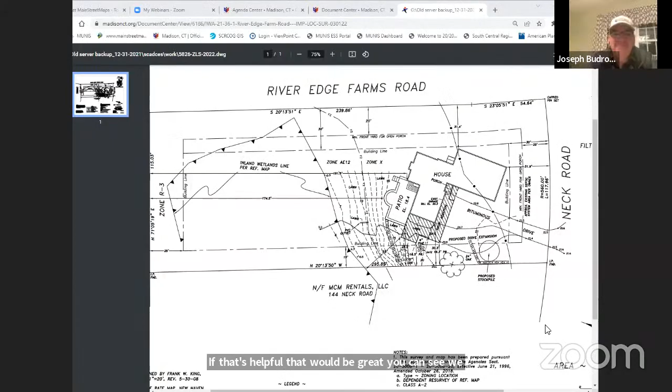Now we're talking, there you go. Okay, that's great, is that easier to see? This is the wetland line. Erosion controls here, and it's closest point to the new structure. Lynn, correct me if I'm wrong, this is all new? Yes, 35 feet.

And those things that look like dominoes from the patio to the property line, is that a wall? No, that's erosion control. Joe, silt fence, hay bales.

So what's pretty steep, what's the line that says FZ? FZ, flood zone. Oh, okay, I'll stop asking questions now. Oh no, that's okay. Usually it's spelled out, but now I see it, Zone AE 12.

Okay, so I think she's added everything we wanted. It became, it's gone from question mark and less vague to pretty specific. Are there, well, and this, thank you, this makes it much easier to see what you'd like to do.

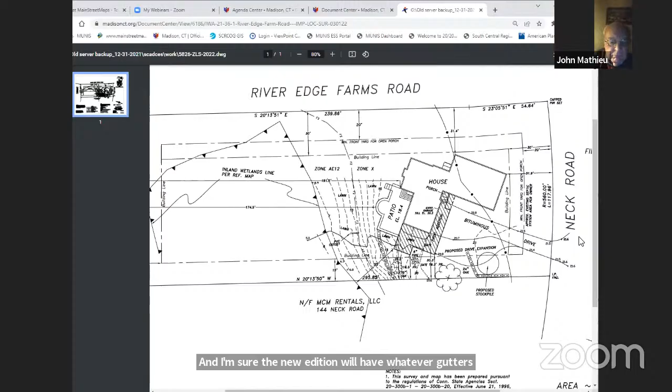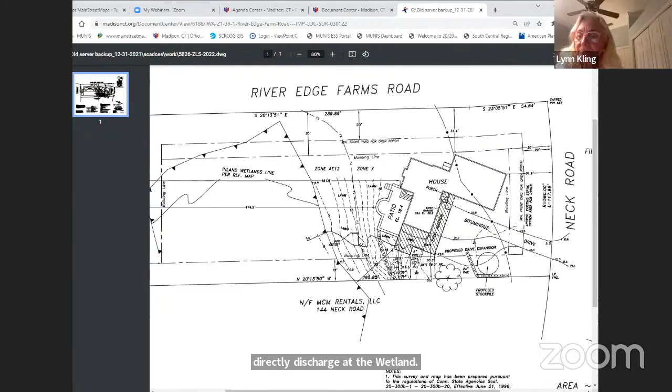We do have existing gutters, and I'm sure the new addition will have whatever gutters or leaders you all think we should have to mitigate any water drainage. We just couldn't tell. That would be relevant to the agency if perhaps you were extending those roof leaders to directly discharge at the wetland, since you have a PVC outlet pipe already on that slope. I didn't know if that was for leaders or a footing drain, or if you were proposing any type of pipes like that. No, to my knowledge, no one has mentioned that, so I don't think we'll add to that at all. Just your normal everyday gutters is what I thought we would have.

Okay, thank you. Other questions for the applicant?

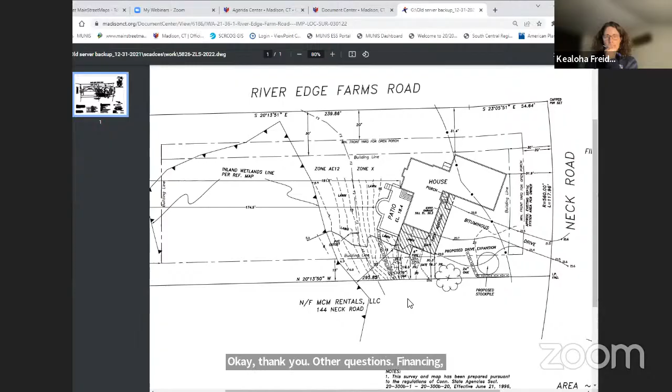I move we approve application 21-36, 1 River Edge Farm Road, with the condition that the erosion control measures shown on the drawings are implemented before construction. I'll second it. Any discussion or modification of the motion? No, nothing to add from me.

All right, all in favor? Aye, raise your hand or say aye. Any opposed, abstaining? Okay, thank you. Good luck with it, thank you very much.

Joe is going to take over for 22-01 Warpas Road. This is the land use - this is the Madison Land Trust. They should have updated materials for you.

Let's hope so. At this time, we're going to move on to application 22-01 - is that correct? Did they have an application before, or is this a newer number? I thought they were a 21. There was one application, Joe, that was withdrawn and then reapplied after plans were a little more detailed. Okay, thanks Aaron.

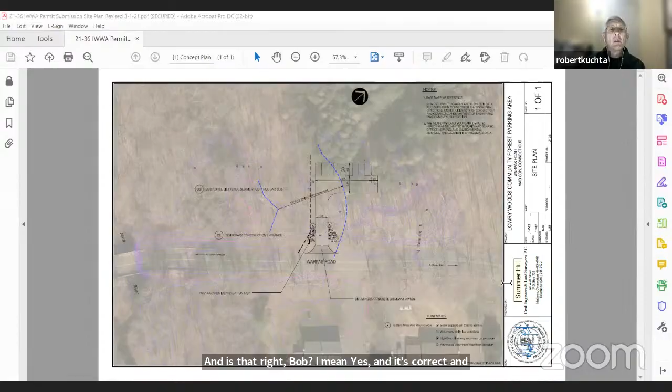So the large circles are the thicker diameter plantings, which I think are white pine. Is that right, Bob? Yes, that's correct. The smaller circles are the series of high bush blueberry, viburnum. I see, okay, thank you. Ben, maybe you could zoom in a little bit so they could see it a little closer. Oh, sure.

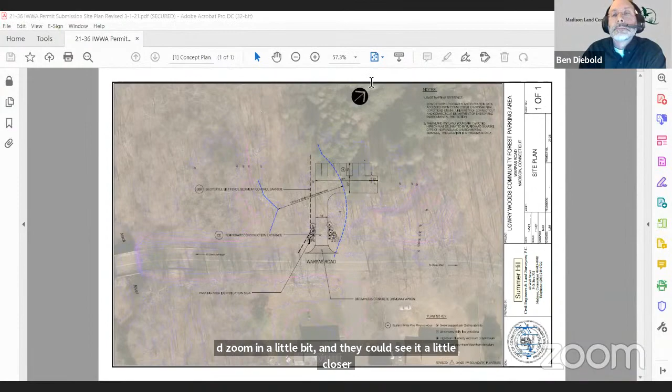How's that? Is that any better? Sorry, I'm getting these weird things, yeah.

The white pines, Lee, on each side are to create a bit of screening from the neighbor across the street. That was one of his concerns, that he not be able to see the cars when they're parked back there. And then the pines are underplanted to give a density of ground cover and additional screening while the white pines are growing up.

That makes sense. And they're in the areas to the right or to the east of the silt fence. And that actually is the limit of the clearing that was done out in the field. When I was designing the plantings, none of the plantings are in the undisturbed or uncleared area, so that vegetation is still stable.

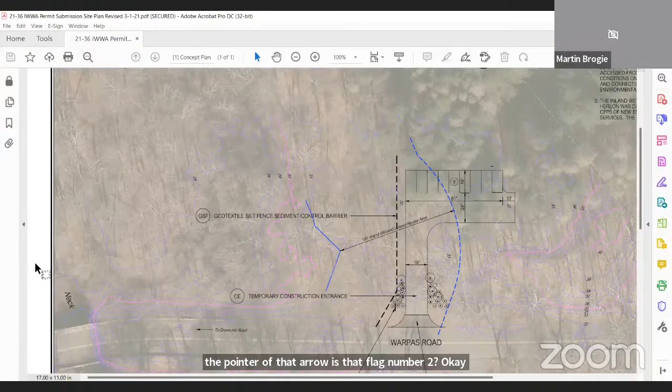Martin, if you see the 100-foot inland wetland boundary review area, the pointer of that arrow is at flag number 2, the wetland flag. And then just above the word entrance is flag number 1. And then where it says sediment control, those are flags 3 and 4. That's basically the limit of what Rich Snarski had flagged, only because the area of clearing was about parallel to the west of that.

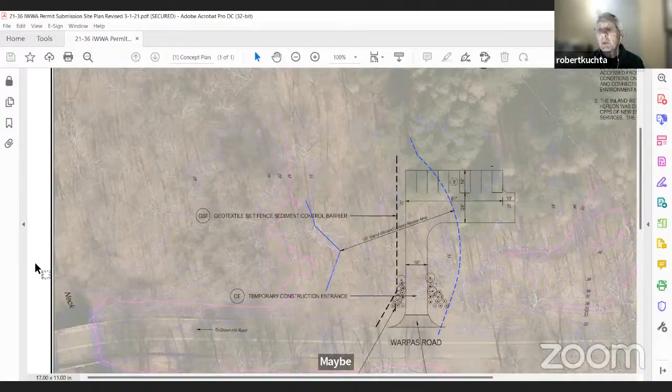That makes sense. So were those flags located by survey or GPS? No. Maybe Mike can help. Is Mike on there? I think they were located by GPS. Okay, all right, thank you.

A second question, the plantings - you mentioned high bush blueberry and a viburnum. I didn't catch which viburnum it was. Viburnum dentatum, that's arrowwood, correct. Okay, and white pine. And what are the other species? High bush blueberry, native high bush blueberry, Clethra alnifolia.

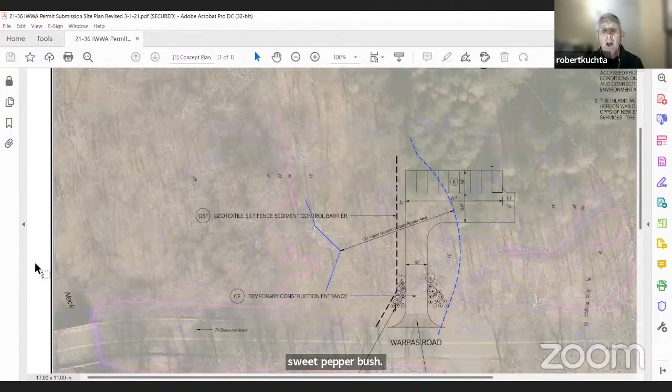Sweet pepper bush, okay. And winterberry, yes, the ilex. Okay, I love those shrubs, it's a great selection. Those are typically wetland shrubs, and they're being mated up with a white pine, which typically likes the soil pretty dry.

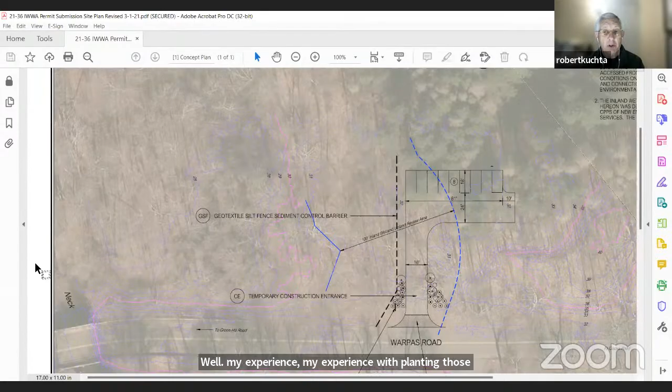So I'm trying to discern how the selection of the shrubs came up - it's almost a wetland shrub design and an upland tree design. Well, my experience with planting those particular shrubs in upland soils has also performed very well. So they have a very good soil tolerance for a range of soil moisture levels, and shade and sun tolerance too.

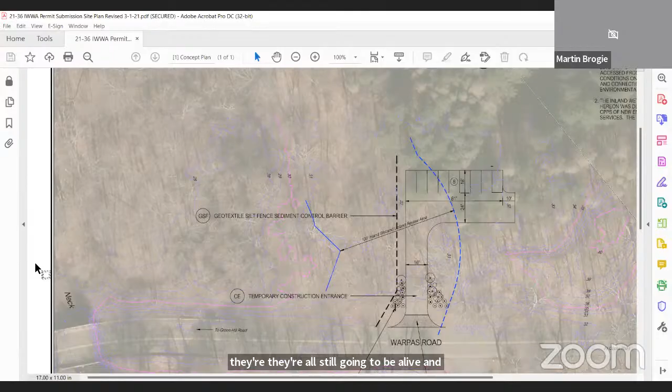So we don't have a formal landscaping plan, but I'm looking at this as sort of being like a mitigative effort, and it's nice. So do we have a count on plants, and will there be a follow-up to ensure they all survive - a monitoring plan or something that says we install these plants and a year from now they're all still going to be alive? I was just wondering if there are considerations for replacement if they fail.

Those are all options for conditions also, Martin. Sure, yeah.

Is there at least a list of the plantings in the file? I believe it's on the plan here, correct?

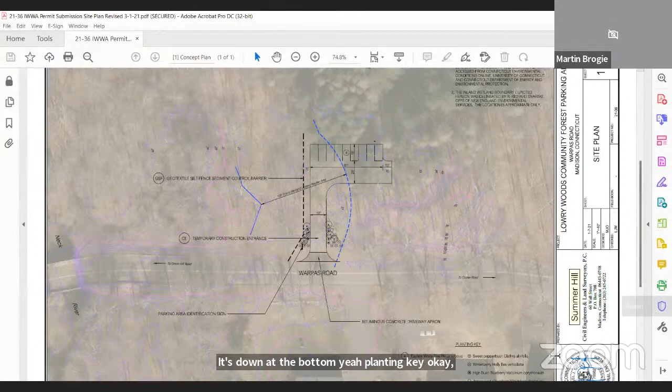So when do you hope to be finished with the project? I don't know the answer to that, we'd love to be open in time for hiking season. I would think the construction of the driveway and parking areas would be done first, and then the plantings would be done after all the heavy grading is done.

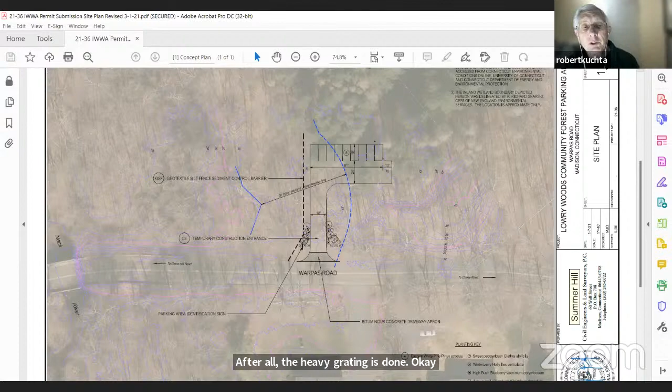We definitely wouldn't put the plantings in before the road or parking spaces. The ground itself is stable at this point, so there's no erosion currently. The topography is very flat, with a rise to the west, and the root zone is perfectly stable and would catch any water even without erosion controls installed. But those would be put in before the gravel's put in. I want to ask forgiveness if it was already said - the base of the parking area will be gravel. Yes, that's right.

Okay, so any other comments or questions from our commission? I want to thank the applicant for coming back with a plan that actually showed locations and clearing areas - it's a big improvement. We appreciate your patience working with us. So I guess at this time, if there are no more comments, is there anyone who would like to make a motion to close out this application?

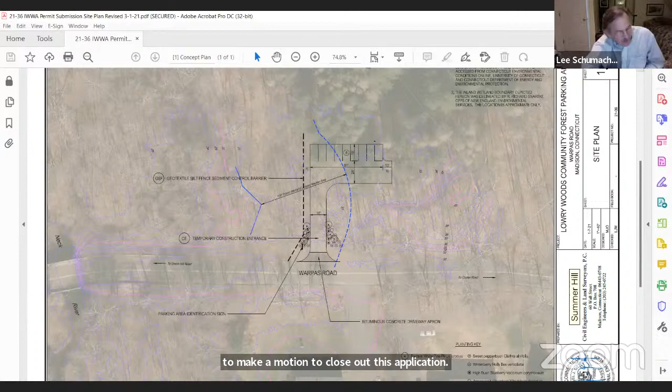I move we approve application 21-36, Warpas Road, with the plantings as indicated on the new drawings. I'll second. I'm going to just add as a condition, if for any reason the plantings fail, there's no need to come back here for a modification of any kind - just consult with John and he'll oversee the replacement of any vegetation.

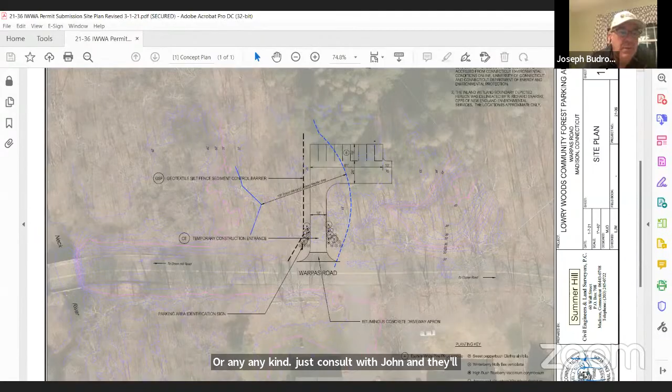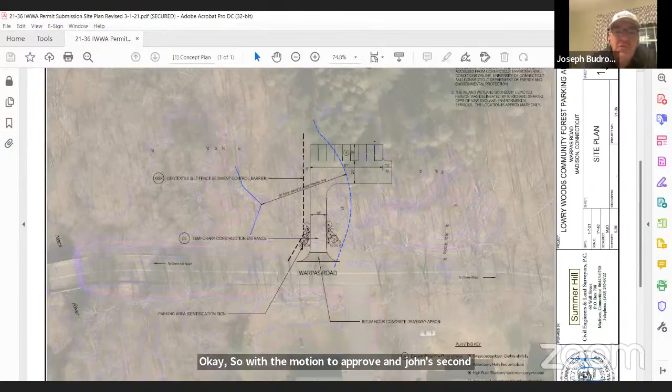Okay, so with a motion to approve and John's second, let's have a vote. All in favor to approve? Aye, aye, aye. Okay, sounds like it's 4-0, approved.

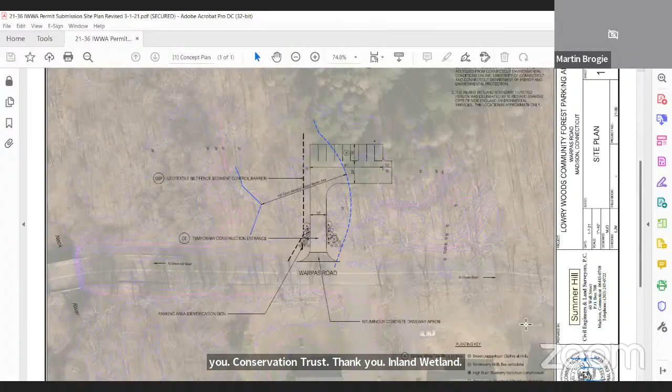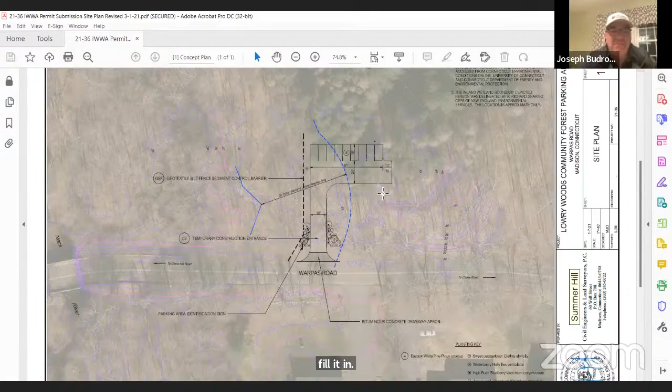Yep, you'll probably see me out there planting these shrubs and trees. This could be a Mad for Trees effort, Bob. Well, yes and no, maybe the pine trees - we're not buying shrubs. But I think I might have a source of white pines from our collection, they're on order already. It looks like you could find a pine tree beyond the parking area and transplant it. No, I'm using container grown so the root system will survive very well. I probably could transplant a few small ones and fill it in. I'll start driving by in May and look for you. It might be as early as April. Oh, good.

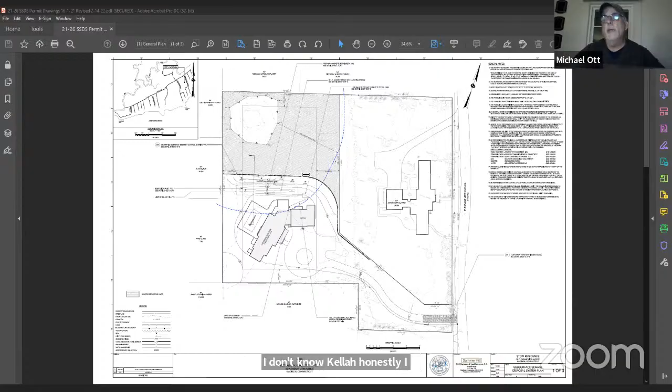Yeah, it's definitely a wetland, so you shouldn't go in there and rake it or do anything. Are you thinking he might suggest different plantings for the wetland proper? I don't know, Kayla. Honestly, I was thinking he might want us to seed it, because that wetland's vegetation is no different than the vegetation outside of it. It's simply, as you probably saw, a depression. There's maintained lawn all around it on the neighboring properties, right up to the fence line. But I didn't want to do that without his recommendation.

Okay, I suppose if he thinks we should, we could have a conversation with John about it. But yeah, seeding a wetland... I guess I don't know what exactly the no-mow mix is. Is it wetland friendly plants? According to Rich, yeah, but I don't think it matters, since we're not proposing to go in there.

And are you going to have anything outside of the vegetation itself, any delineation to show that that area is no-mow? Because it's good to have it here, but when someone in a house sees this nice flat lawn and this little dip that is wetland, but could be disguised part of the year as not a wetland, without proper delineation it might be easy for it to be mowed or otherwise taken over. Right, so we talked about that. If the agency would like to condition this somehow, that it be delineated, we'd be glad to do that.

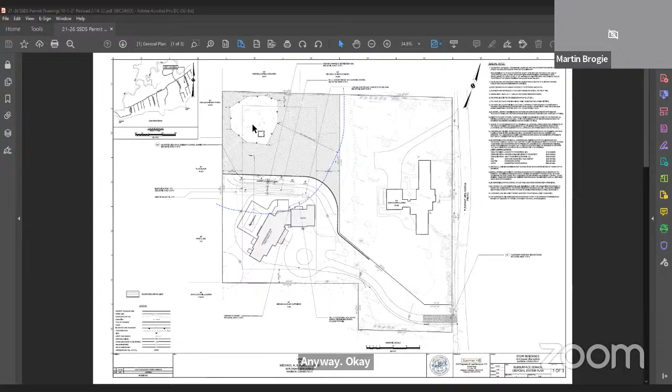So it sounds like the commission is looking to ask for a report from Mr. Snarsky. And I would add that some measures to preserve and enhance what remaining wetland is there, something to provide shade. If this thing does have standing water in it, even on a seasonal basis, it could provide, as Kayla said, peepers habitat, amphibians. It's important habitat potentially, and it looks like it was pretty mature and forested, surrounded by shade at some point. I think it would be prudent to look to see what Mr. Snarsky would say about some kind of restoration and protection of the area moving forward.

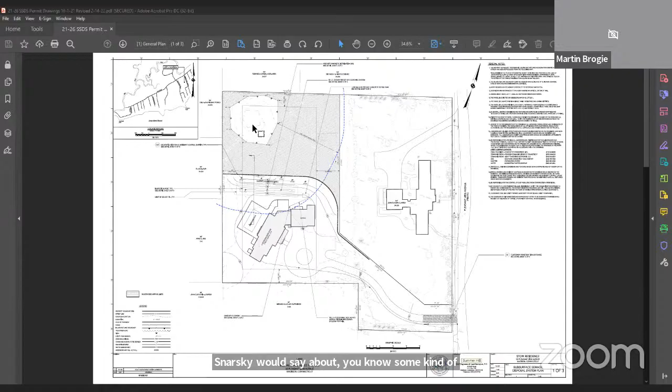Any other comments from the agency? All right, all right, Mike.

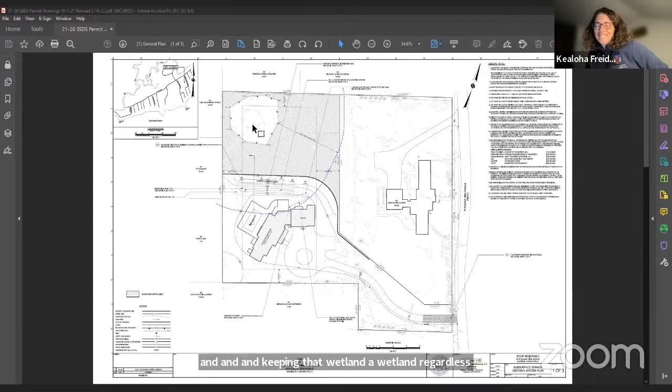Sorry, we're not acting on this in the way that I think you'd hoped, but hopefully you have a sense of what the agency is looking for with respect to delineating the wetland, understanding more about the wetland function and values, and keeping that wetland a wetland regardless of its depressional state. Yeah, I'll talk with Rich Snarski and we'll try to get him to attend the next meeting also. Okay, that'd be great. All right, thank you.

Thanks, guys. I think, Kayla, we should have a motion to table this to next month's meeting. Do we need to, even though we don't have to vote on it? I mean, that's fine. I'll make a motion that we continue application 22-03 to the April meeting of the Madison Wetland Commission. I'll second it. All in favor? Aye. Aye. All right, we'll see you next month.

Thank you. I think in the past, when we had, so this is a newer system, we would receive and talk on the first night and then just move ahead. But it's good to be dotting our I's and crossing our T's.

Okay, our next application is 22-04, 301 Boston Post Road. Some of us were also on this site walk. This is the one next to the Neck River. There's a future proposed house, and they're proposing a smaller structure for this current application.

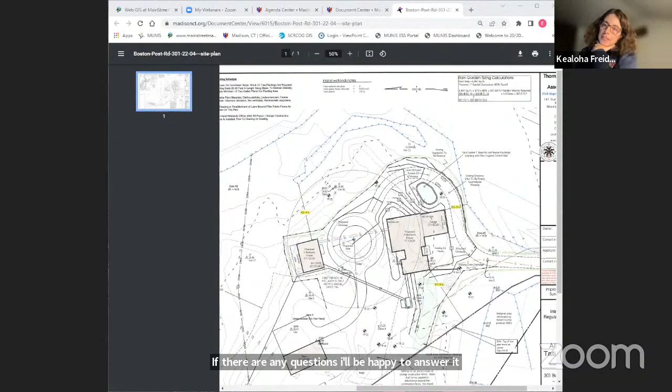Does anybody have any questions for the applicant? There's also just one more thing, Kealoha.

There is a power line that runs through there. The transmission lines run for quite a distance, parallel to Route 1. There are no formal easements in there, but I believe the power company does come in occasionally to do their standard clearing. Right, we talked about that. Some of these older power lines had no easements, and Eversource is trying to clean those up now. So sometimes whenever there's some activity, they try to grab an easement when they can, but the landowner is certainly under no obligation to do so.

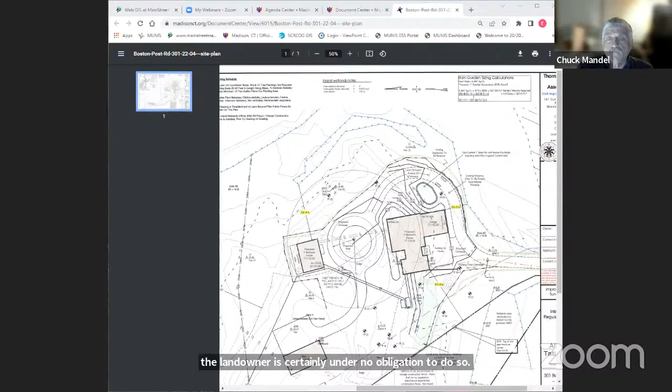This is Martin Brogy. I just have one question. You said the wetlands as shown on this map are Bob Russo's delineation, or are they? Yes, Bob Russo had done that. Is his name on the plan here? I'm just kind of scanning around for it. Nope, not on this one.

I believe it may have been on an earlier version, but I can certainly get his signature and name on the final plan. Did he write any kind of a soil scientist report about the vegetation for this particular application? Like I said earlier, this has been in the file many times. It's been looked at. So there is a report on file for this property. I think it would be good to get his signature on there. Absolutely, with any plan before us, we need to see the soil scientist's signature and/or report.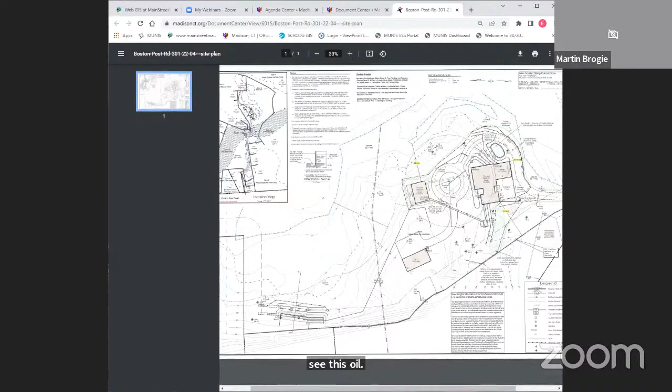As I said, this is ancillary to the main application that had been previously approved. So it's really just that 800 square foot structure that's the addition. I think the site walk answered a lot of questions, and there's not going to be a lot of earth disturbance, since a lot of the areas are flat and have pre-existing foundational areas.

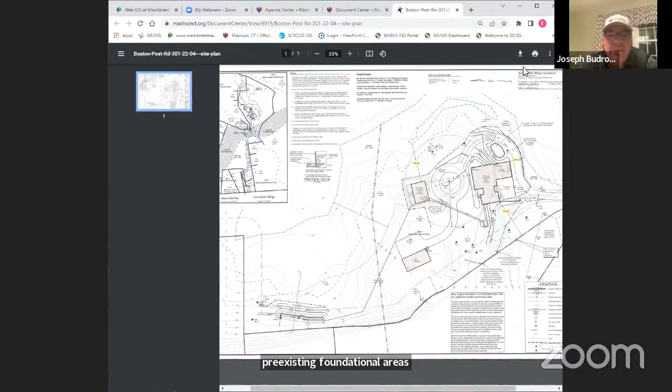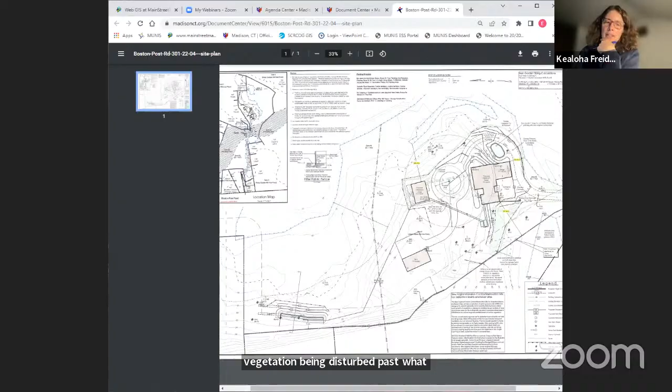Other questions or comments? I'll just add one: I think it's great that it's called out on the plans that there won't be any removal or vegetation disturbed beyond what you've shown, especially since the whole area is pretty close to different parts of the Neck River wetland area. All right, anybody else?

Would someone like to make a motion for this application? Wait, first my question - I know this plan's been in front of us before, but the application number looks new. This is its second time in front of us, Aaron and John. It's been received? Yes, this has already been received. It was received at the last meeting, and then you did the site walk, and this is the second time.

I'll make a motion that the commission approve application 22-04 for 301 Boston Post Road as presented. I think we need to add the condition to put the soil scientist's name on the drawings as well. We need a second. I'll second Joe's motion, and yes, I do think we need the condition to put the soil scientist's name on the documents. Other discussion, conditions?

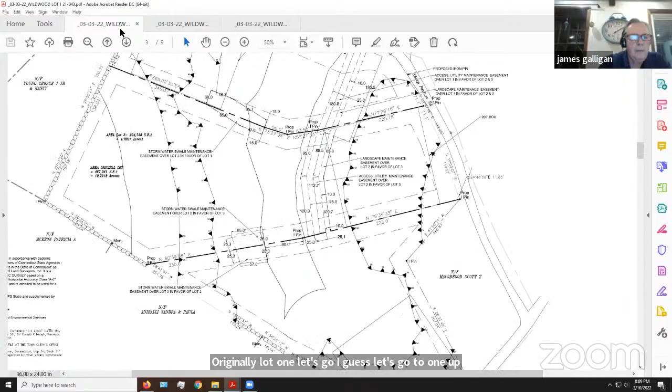Have revised the lots in that manner. Originally, lot 1 - let's go up to sheet 4, Nick. Originally, this is the same lot. Originally, lot 1 was accessing directly out onto Sheep Pasture Road in that area right there. With some discussion with Aaron and some discussion with the property owner, we've adjusted the driveway for lot 1 to access off of the common driveway that leads to lots 2 and 3. That accomplishes a couple of things: it leaves the northern boundary of the property undisturbed. The common driveway was an area already being disturbed, so access from the common driveway to the house makes more sense. It leaves the frontage all along Sheep Pasture Road undisturbed, and all the vegetation can remain.

There have been a couple of changes that we've made. As I mentioned, we changed the location of the driveway. The house is basically in the same location as was approved by the commission for the subdivision. The septic system was shifted northerly a little bit so we could fit the pool in on the southern side of the property. The pool was farther east previously, but we shifted it a little bit to the west.

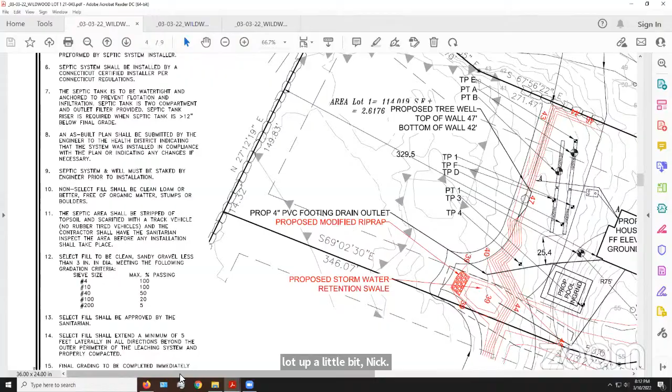We added a tree well. You can see where it's called out, proposed tree well. There is a significant tree there. We felt it was more prudent to put a tree well around the existing tree to preserve the vegetation — it's a large standing oak. It was a pretty significant tree, so we are proposing to put a tree well around it.

While we're looking at this sheet, you can see the red lines are the contour lines associated with the grading. The proposed ground on this application, when we did the subdivision, was elevation 49. As it is designed now, it's at elevation 48. That difference is not something even a trained eye like mine would be able to tell — there's really no change to the grading in that area.

I think it's important to recognize that in all three applications — and I'll say this again for the second and third lot — the grading in this area, the red contours, is exactly as was proposed during the subdivision. The only difference is that when we added the stormwater swale area, we changed the grading to fit the new swale, the final design. So there's no change on the east side of the parcel where the common driveway is, and no change to that driveway location.

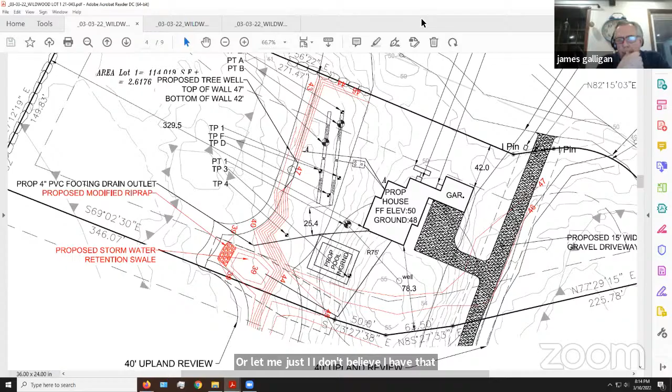Do we have the image of the landscape itself, or you want me just to? I don't believe I have that. I don't know, Mike, did you bring that to them? I did, yeah, I forwarded it on. Aaron, do you have a copy? Are you able to share it? Okay, let me — thank you. I could get my 13-year-old to help me if you want. No, he can help me. I didn't have it out for you here.

While she's bringing the drawing up, I think it's important to say that the goal was to maintain the development of this lot consistent with the approved lot in the subdivision plan. The changes that are significant are what we feel are environmental improvements — they limit the clearing along Sheep Pasture Road, and there's preservation of existing vegetation. I know the question will come up: Rich Snarski did do the wetlands, they were located by survey, he's noted on the plans, his company is noted on the plans. There was a soils report submitted with the original application.

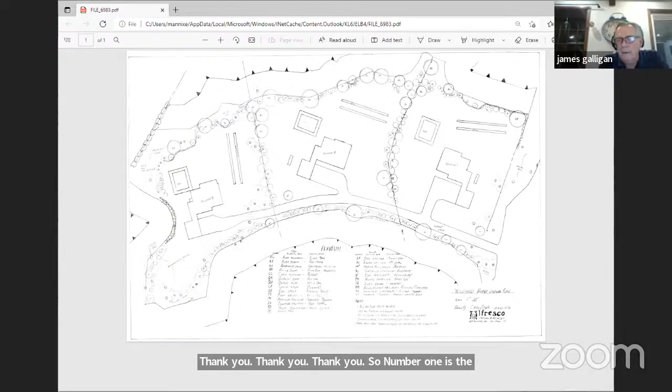So lot number 1 is the lot on the right, and I'll let the landscape gentleman talk about his plan. When you come in off the road, the idea was that the area on lot 1, most of that is native soils.

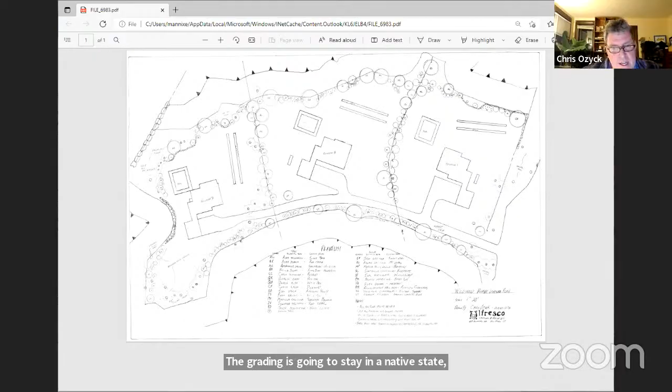The grading is going to stay in a native state, and there's existing trees there that we're retaining. Everything between the roadway and where the remnant wall is, is town property, and that will all stay as native plantings. The only thing that will be cleaned out is a little bit of dead wood.

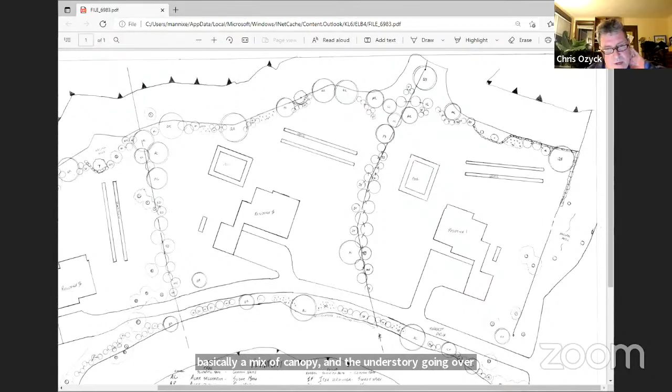So for lot 1, as you go to the back, we have some stone walls there that will help with the grade change, over to the right there. We have an oak, and then a bunch of plantings above the wall, and then it comes around where there's an existing tree, and goes into basically a mix of canopy and understory, going over to where the swale or retention area is.

We have heavier plantings in that area. The idea is that a lot of these plants are facultative, meaning they can grow in both wet and dry conditions. So you'll see red maples and things like that. But the idea is that you want to have both canopy, understory, and shrub layer, and then massing of plants so that people can identify them easily as something that's supposed to be there.

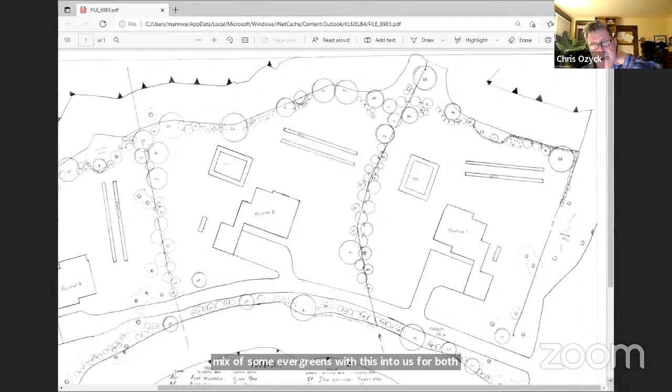As we come up through, there's a little bit of a mix of evergreens with deciduous for both screening and for vitality in the wintertime, foraging. All those pieces need to be there, so I try to do deciduous throughout the plan as it comes up through the border, screening and the other side of the drive.

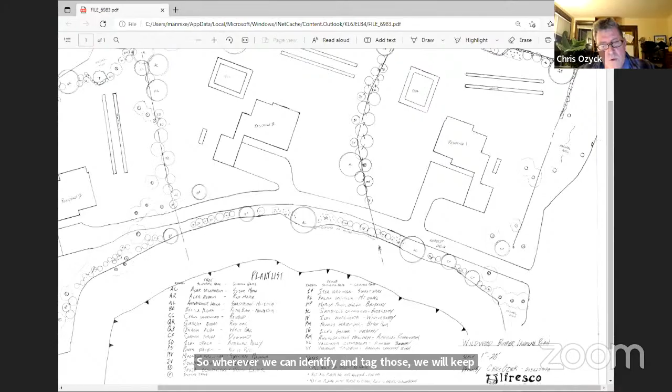There's a fair amount of native plant material that we will try to maintain through there. There's a lot of basic plants like clethra, a large grouping of clethra. It's sort of a stony area in there. So wherever we can identify and tag those, we will keep those because those are gold. And then we want to supplement plantings adjacent to them. All these plants will be positioned, though they may just be moved a little bit left or right, depending on whether there's an existing desirable element there right now.

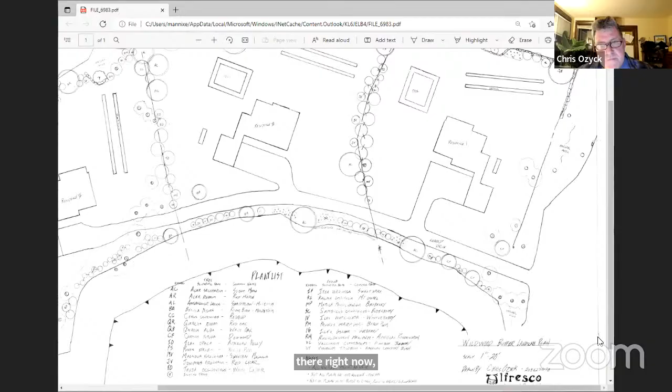Okay, so that kind of wraps what we're proposing to do with Lot 1. I think the most important thing to recognize is that we tried to maintain consistency with the original subdivision, and the changes that we did make, we felt were intended to either enhance the vegetation that's there, or preserve the vegetation that's there.

So are there questions from the agency on this first lot, I guess? I have one. Can you go through the decision making as far as the location of the pool and the leaching fields in lot 1? And in lot 2, because just looking at the drawings, it seems like the leaching fields could be put between the two houses instead of in the back. If you show the plan again, you'll see what I mean. I'm sure there's a decision-making process that went through it, but...

The original plan had the septic system farther to the south and the pool farther to the west. The decision to move it to the northern side was twofold: one, the soil conditions were better there, and two, that move didn't change the sloping or any of the grading associated with the lot. So when we moved it over, it didn't change any of the grading in that northwest corner. We felt that it would not be inconsistent with the approval presented at the subdivision stage.

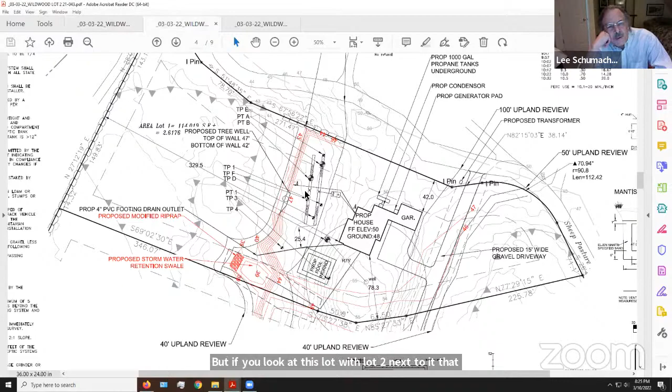I forget what our discussion was back then, but if you look at this lot with lot 2 next to it, and that overall plan we had there... The overall plan is sheet 3, I believe. I'm just looking at the plan, and it just seemed like the two leaching fields could flip 90 degrees and be between the two houses rather than closer to the wetland. But there may be engineering reasons why that can't be done.

Let's zoom in on that a little bit, Nick. Okay, there's a couple of things. One, notice the angle of the existing contours. The septic systems have to kind of parallel those existing contours, because of the restrictive layers. Okay, that's clear enough. Yeah, I get it.

If I remember right from the site walk, the grading is going to be pretty much cut and fill, with no fill brought in. That was another goal we tried for from the beginning, much to the developer's disappointment. There's a ton of topsoil here that he could probably farm out, but we tried to maintain pretty much a balance of the material. Sheep Pasture Road isn't a road we want to be running triaxles up and down on a regular basis to construct this site. So the site, all three lots together, which is how the grading will be done, is pretty much balanced.

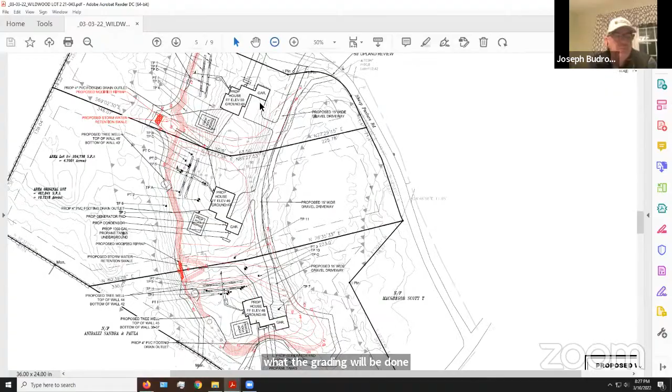I think he kept referring to the subdivision as a self-sustaining subdivision. He had some... that's right, he was using the engineers' terms. I still speak in vanilla.

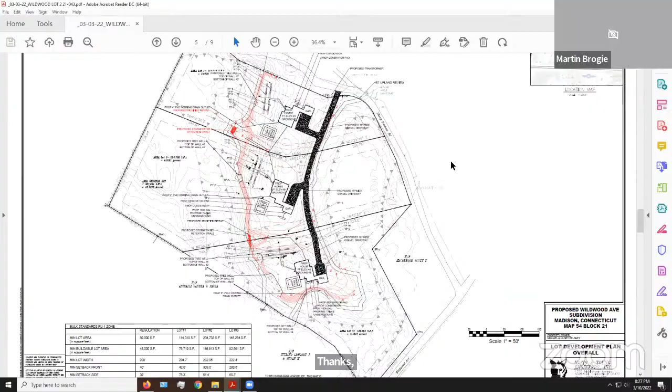Thanks. Can I have one question? Oh, I'm sorry Martin, go ahead. No, go ahead Erin. Thanks.

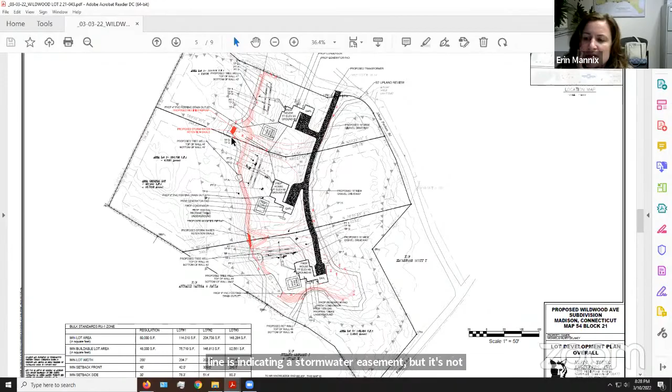My question is just with respect to the stormwater swales there. I know that the dark dashed line is indicating a stormwater easement, but it's not labeled as such on any of these site development plans. I think that's something that should be updated on each of the site development plans to identify where the stormwater easements are.

It is identified on the lot line revision plan, and it appears you're correct, as I'm looking at page 4. Yes, we can clarify what the lines designate, because they're on the lot line revision map, but we'll identify those. Thank you.

I'll bet you're going to say the same thing on lots 2 and 3. Likely.

My only other question on this site development plan: do you have a section of your retaining wall? Not necessarily wetlands related, but as these are your site development plans, your retaining wall looks to be 5 feet tall on lot 1. It is going to be—I didn't do a detail of it because I thought it would need to be submitted to the building inspector when it comes time for the building permit, but I certainly could put the detail here.

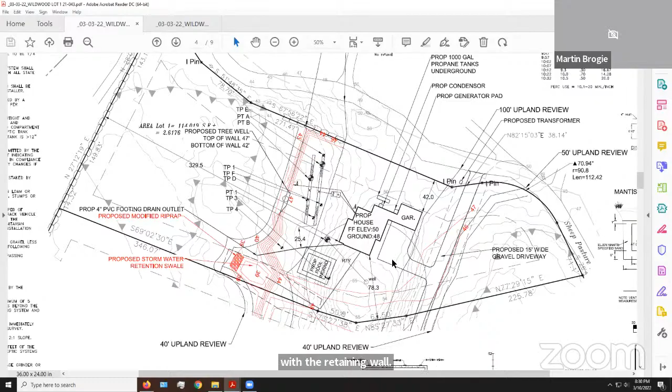That's fine. I'm curious, because I know there are setback distances between septic systems and drainage features, such as footing drains and back drainage for retaining walls. I'm concerned the septic system discharges might get tangled up with the retaining wall drainage features. I can't make out the scale terribly well here since I don't have the full set of plans in front of me, but I'm wondering what the distance is between the septic system and the retaining wall. The distance between the septic system and the footing drain is identified there, 25.4 feet. No, I guess I meant the required distance. Yeah, go ahead, I'm sorry, I didn't mean to interrupt.

The required distance between septic systems and drainage is 25 feet. It looks like we have a little more than 25 feet from the tree well retaining wall and the septic system itself, although it's directly down gradient. Those meet the health code.

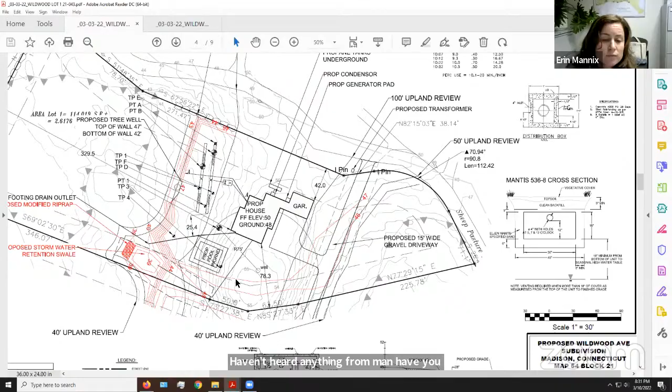The septic systems are in front of the health department as we speak. So you're still waiting for approval from the health department on this? Erin, have you heard anything from Amanda? No, I have not. We haven't gotten a final response back.

You had said there were some issues with restrictive layers or shallow groundwater, so you had to engineer these systems and raise them up a bit. Yes, and they're all in compliance with the health code. That's why we have those slopes in the backyard, because you're importing fill to get those systems up.

Well, the only fill that's being imported - bring that page up a little more, Nick. If you look down on the right-hand side, the cross section - let's stay right there. That's good. The only imported material is the septic gravel, which is standard for the engineered system. All the other material is just native material from the site.

Oh, I see. This is probably a gravelly knob, and where the house sits is a high point, and we're just knocking it back. That's exactly right, yeah.

What's going in as treatment inside those stormwater retention swales? The swales themselves are just going to be grassed. We're looking for just your general root uptake. The landscaping plan actually runs right up through the center of the swale, so all the vegetation in that string running east-west actually runs in the swale.

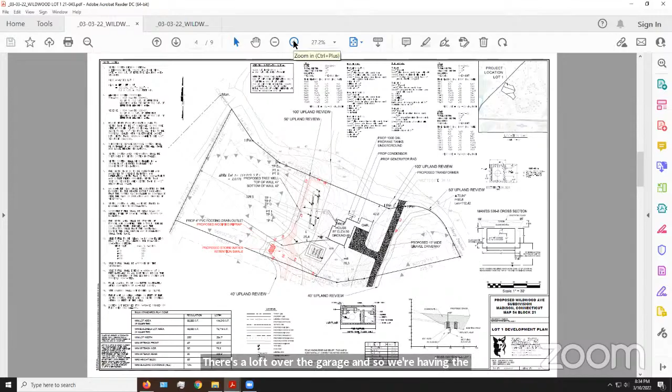So we're having the septics designed for 5. We're going to do an option to put a bedroom up there, so it could be 5. But the septic system will be designed for a 5-bedroom. We'll build the home as a 4, with the option of putting a bedroom above the garage as an in-law suite.

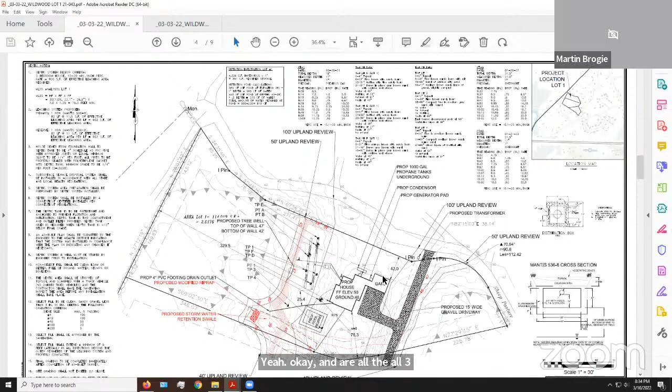And are all 3 septic systems within the 100-foot upland review zone? I'm going to say yes, but I'll have to look at each individual one to confirm.

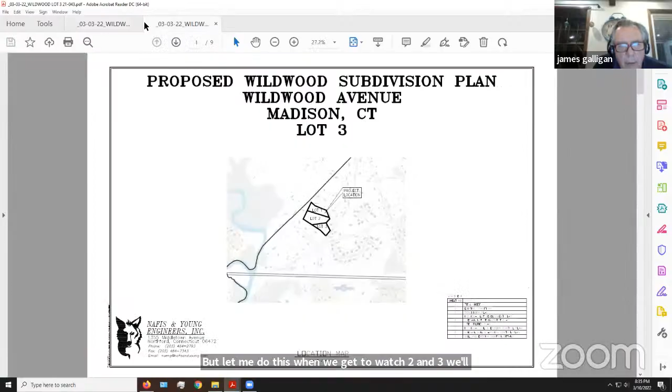But let me do this - when we get to lots 2 and 3, we'll... Nick, let's blow up this overall plan. I think lot 3's septic system is not in the upland review. I think it's in...

You don't have the 100-foot upland review labeled on your plan. It depends on which sheet you're looking at. Maybe on the individual lots we'll see it. Yeah, on the individual lots you can definitely see it right here - this is the 100-foot line. So that one lies within it.

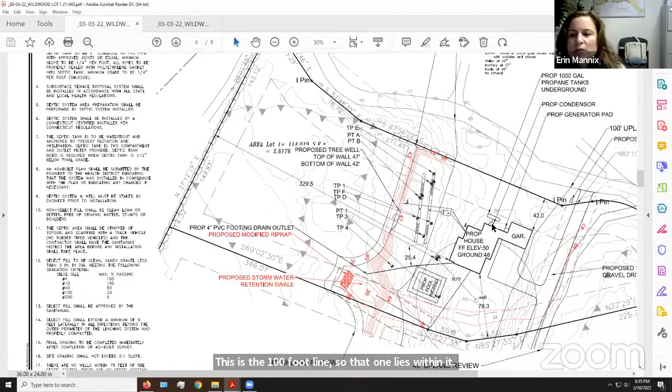The 100-foot line is also on the other side of the house, Martin, as you can see from the other wetland. So it's essentially a small sliver in the center of all 3 lots that is outside of the upland review area.

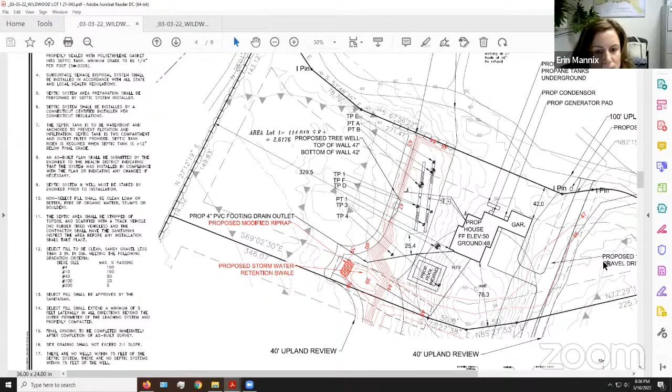I think what we tried to do is be as consistent as possible. In the areas where we weren't as consistent, we were trying to either preserve existing vegetation or enhance the grades around the property. The landscape architect mentioned that on the east side of the driveway, there's a significant amount of landscape vegetation being added. That will enhance, for lack of a better term, the buffer between the occupation of people and the wetlands.

If the commission remembers, at the time of subdivision, you had concerns about the maintenance of those wetland buffer plantings and had recommended as part of your report to the Planning and Zoning Commission that it be maintained through an easement. So that's shown. It's now shown on the site development plans that there is that easement, that cross easement, but the language was in place at the time of subdivision to allow the property owners to maintain that wetland buffer. So that did get approval.

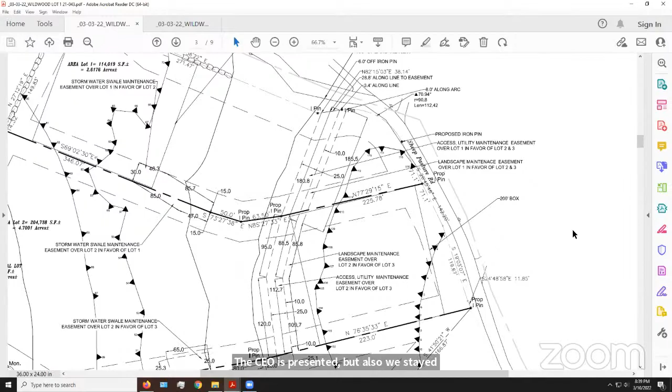But also, we stated that it will be looked at for, I think, a period—I want to say 2 or 3 years, I can't remember exactly what the language is—but it'll be reviewed by Chris on a yearly basis and a letter presented to the Wetlands Commission on the existing conditions at the time of that garden.

So the idea here is to create a natural, identifiable buffer that delineates the no-disturbance zone, and to create an area where people can come out and use it, whether it be flowers or edible berries or just looking at trees, but a definable buffer that people can come up to that signifies that boundary.

I'm hoping that whoever else buys the homes buys into the character of it. We're going to explain to them in detail what the improvements are that are made, and each lot is going to have to incur part of the landscaping budget. So we're hoping that we find people that want to come down a driveway presented by a native buffer garden and not something that's going to deteriorate.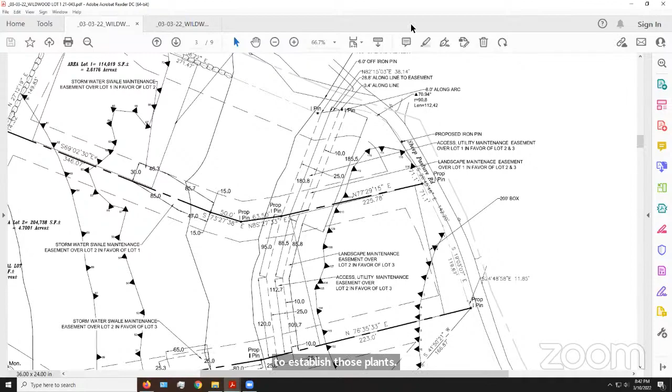But it's going to be an irrigation challenge. We're going to make sure that whatever we plant is going to survive. We're not going to go out and do this extensive landscaping plan without being able to establish those plants. I think a big part of it is when we plant them—ideally we'd want to do it right about now or in another few weeks, but that's probably not going to happen.

We're committed to that plan. The plan is part of the build out, part of what's going to be accepted, hopefully. We're going to have to honor what we have committed to do there with that maintenance plan. So that maintenance plan is also going to be part of that commitment.

What does it mean, Kealoha? I'm sorry, Joe. I was just going to let you know that you do have the ability to bond for these wetland plantings and require a maintenance bond as well.

Yeah, to ensure that they survive at least a year. So I just wanted to touch on that. We had already agreed that we wouldn't be able to get a CO for each individual lot until that landscaping plan around that home is finalized.

I would hope that that would be significant enough. I think that from what I've seen, we're making a very big effort to bring in actually more native plants and more trees and shrubs than what was there. If you count tree for tree, we're actually bringing in more. We're just relocating. A bond is money that could be more useful to our plants.

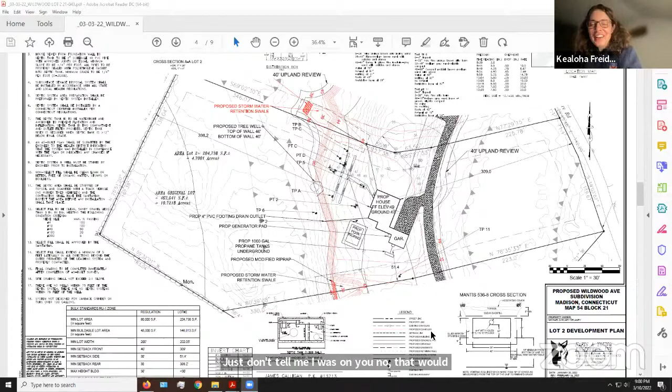Are there any questions for this lot? I know you're going to quickly move on. No, I don't, Gail. No questions.

Okay, all right, and then we'll jump to lot number 3 then.

Just so you know exactly how much of a dinosaur I am, I put my notes in red pen on the yellow pad. Erin, there are some people on this board that used to do that. I can tell that there's some that did.

Okay, so on lot 3, we increased the size of the lot a little bit by just straightening out that top property line, again trying to make the lots a little bit more consistent in size.

This lot has a bioswale on the northern side. It picks up the roof leaders. The roof leaders are connected to the bioswales. The footing drains will discharge freely to the uplands.

The house was moved a little bit northeasterly on this site to get it a little bit farther away from the wetlands.

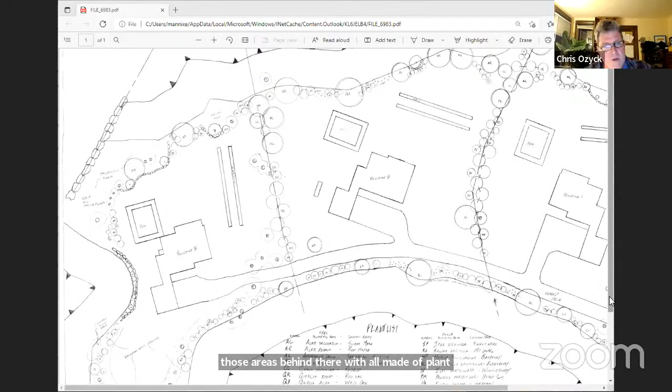So we pulled in the planting to still create that sense of buffer that's contiguous around all three properties, and to steward those areas behind there with all native plant materials that will also enhance the screening that's desired in those areas. In that dog-leg section down there, there's quite a number of trees and boulders, and it's actually a nice section of the landscape, so we just pulled in the plantings a little bit there. There's a lot of desirable spice bush throughout there, and we want to keep that and supplement it with additional plantings.

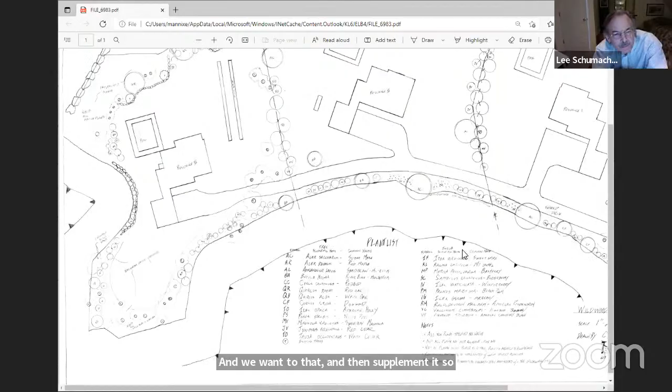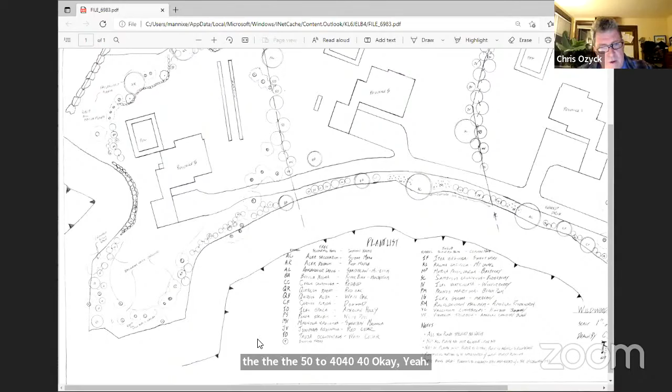So that line to the west of the wetland flags - is that the 50-foot review line? No, the one further down, down to the heavy jagged line. That jagged line represents the 50 to 40-foot offset. I put them in there so you could see them, and where the plantings relate to that - some of the plantings come...

If we could expand this corner a little bit - on my paper copy there's a line there that I think is difficult to see on this plan. It's pretty vague, the extent of the plan.

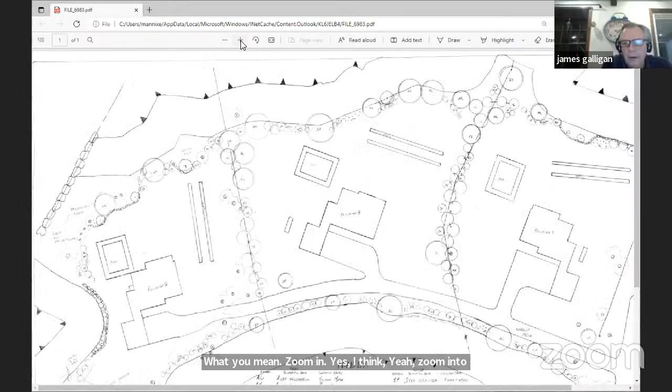If we could just expand that lower corner, that would be great. You mean zoom in? Yes, zoom into that corner. Okay, there. Now you can see at this level that there is a very faint line - yeah, there we go, thank you.

That's the limit of the grading. The heavier line is the 40-foot offset line. Originally we had the grading all the way out to the offset line, but Mike and Chris identified some significant vegetation in that area, and that's why we pulled that grading line back.

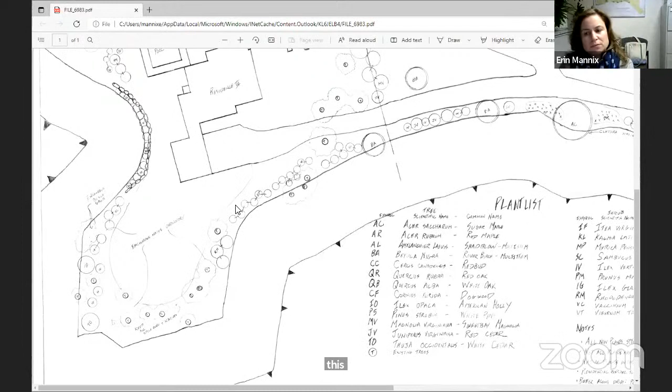This line is also the limit of lawn. Potentially, depending on the homeowner, what we want to do is encourage them to supplement these and come further out to create depth in some areas, going back to the original buffer in others, so they'll have a more natural feel. It depends on how the property owner would want to use that area - they may not even want to have lawn in there, if it were my world.

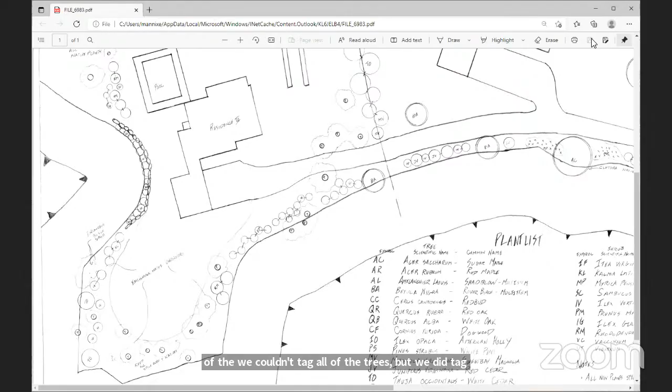I think it's important to notice that we couldn't tag all of the trees, but we did tag a bunch that are identified as T. So in all those areas, that's where the grading will stay existing, and we'll keep those existing trees there. Between lots 2 and 3, we were able to change the grading to save a bunch of trees and keep the soils undisturbed as you come from lot 2 into 3 on both sides. There'll be existing trees saved, and the existing soils undisturbed, which will make it much better for regen and new plantings.

All right, I gotta make my pitch here. I think just for the record, I understand there's a lot of wetlands on this site. We're not touching any of them. We're staying as far away as possible. It's our responsibility to look at reasonable, prudent alternatives. We had alternatives where the driveway came in from Wildwood, but they had to cross the wetlands to use that, so we eliminated that. We also had options where we had 3 individual driveways coming in, but we felt that was unnecessary disturbance. So we did try to look at prudent alternatives, and identify a plan sensitive to the property and to the wetlands without intruding on them in any way, and providing some vegetative restructuring, if you will, to try and offset the impact of the development.

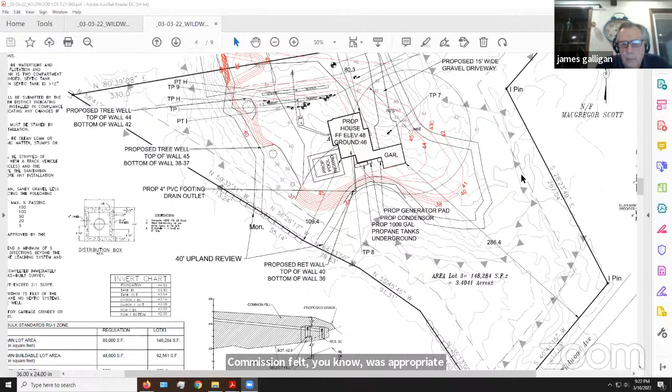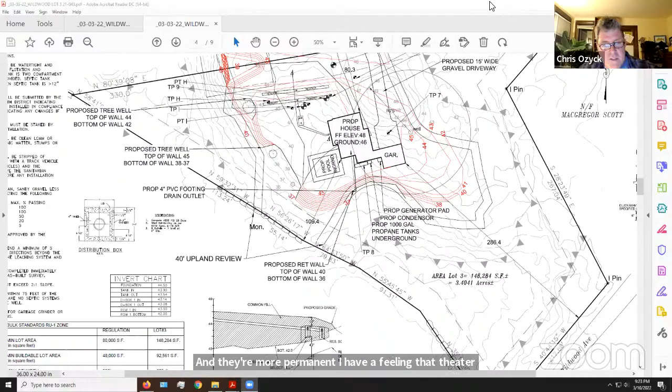Aesthetically, I think an in-ground concrete, 6-inch high element would probably work better so that it doesn't stick out, but you hit it with your lawnmower and it tells you don't go into these areas, and they're more permanent. I have a feeling that cedar posts eventually rot too, and also just the signage on a cedar post may not be as aesthetically getting people to connect. They may feel disconnected because it's like a note where you don't want people to connect with nature. So I'm much more preferential to permanent in-ground delineation.

I would agree. I think some examples of what municipalities have done, as Jim has indicated, I'm sure that we have done in Madison as well. I know from my experience also in Guilford, for the wetland boundary itself, they're triangular metal signs that delineate the actual wetland boundary, and I think that's absolutely beneficial on these properties. Yeah, and another instance where we've seen signage is delineating a conservation easement. I have not seen any larger signs necessarily indicating a buffer planting area, so that's not something we would stock here to provide to the applicant.

This was not designated as a conservation easement area. At the time of subdivision, the applicant's open space set aside was a fee in lieu set up instead. But I think the idea of marking the wetland boundary is a good visual marker for property owners. These easements are also, just for reference, included in the deeds of the properties. That is a requirement as part of the subdivision when there is an easement. But as far as long-term maintenance of these, it's just like any other drainage structure or a detention pond.

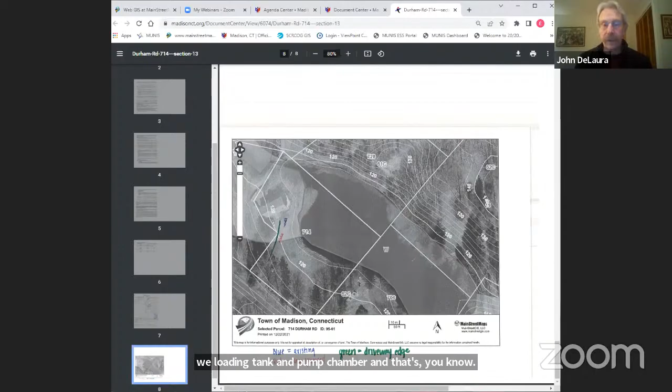And that was pretty much what had to be done in order for the dwelling to comply with the health code. So I did that as a Section 13 administrative approval.

Questions? Nope, I don't have any. Nope, I don't think so. Okay.

The second one is, and I talked briefly with KLO about this, we tried something new but it was met with resistance. This is 99 Deepwood Drive, a subdivision built on fill in the wetlands back in the late 60s. The system was failing. Joe pointed out a month ago that the house was unoccupied, so there was no rush or urgency to repair the system. But you can't occupy the house until you repair the system, so it's sort of a catch-22.

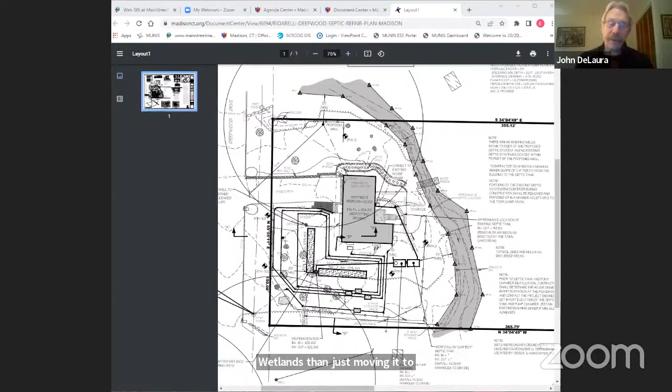The other alternative was to cross the stream with the system and go to their property, on the other side of the wetland - assuming the top of the page is north. I think everyone agreed that would have much more impact on the wetlands than just moving it to where Roger has it now. So I felt comfortable doing that administratively.

Okay. I think that's fine, thank you.

That whole Deepwood area is tough, just tough. These systems keep failing - they were all built in the 60s and 70s before wetlands regulations came, and the water table's coming up, the soils are getting worse, spongy, and they're failing. At least the new systems now are compliant and on suitable fill and sand, so it seems like the best of the worst.

Well, I think that's good. Okay, well, thank you for going through that.